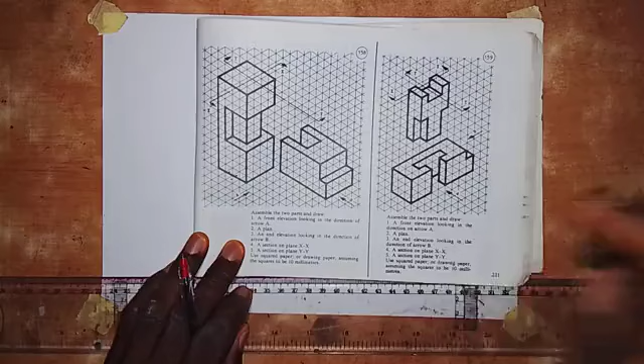Here we are going to be working on these problems on page 231 of J.N. Green Technical Drawing Textbook. As I said, here we are to assemble the two parts and draw question 1, a front elevation looking in direction of arrow A, question 2, a plan, question 3, an end elevation looking in direction of arrow B, and question 4, a section on plane XX, question 5,

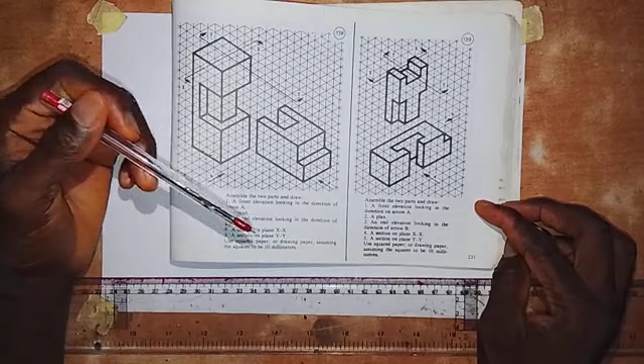a section on plane YY, and we have to use squared paper or drawing paper, assuming the squares to be 10 millimeters. I do not have a squared paper, so I'm making use of a drawing paper. Alright, so we are going to start with a video on the assembling of the parts, because we are going to have a video for each of these questions so that we can find it easy to do.

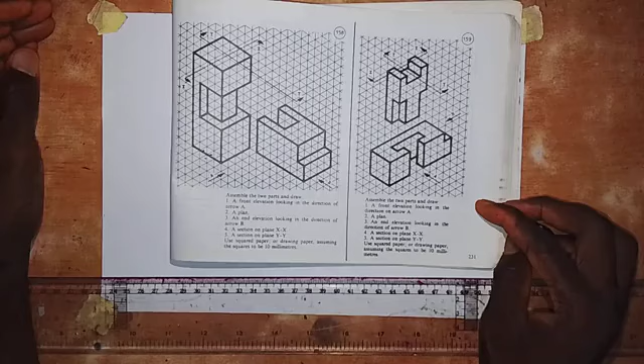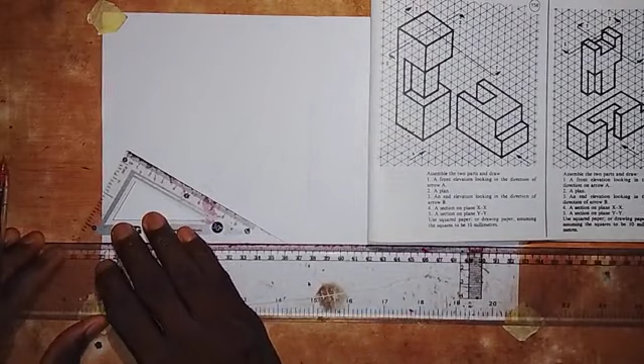So let's start with the assembling of the part. As you can see, we are putting this part in here. So we are going to start with the construction of this particular part here. Let's start: we're going to draw a line in this direction, and then from this point I would also draw a line in this direction like this, and then I will set my set square up like this and draw a vertical line from this point up. So we have this.

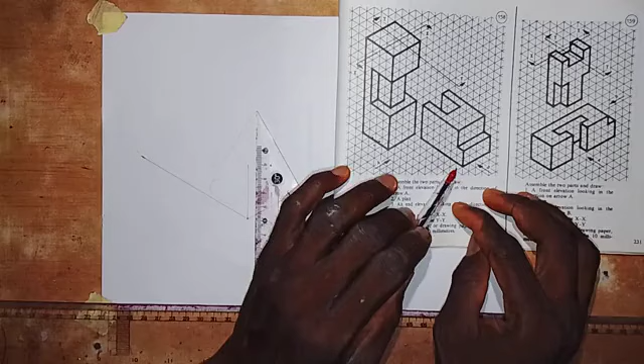We are going to be taking the measurement of this line, and this short vertical line here. So how many squares do we have here? We have 1, 2, 3, 4, 5, 6, 7. That is 7 squares. We are going to multiply it by 10, and that will give us 70. So we take a measurement of 70 millimeters. Why am I using 70 millimeters? Because we are told that each square has a dimension of 10 in length.

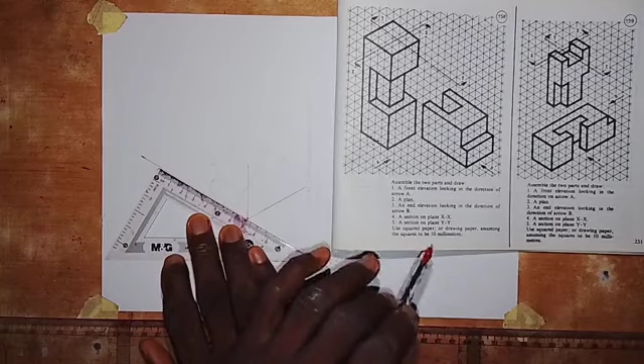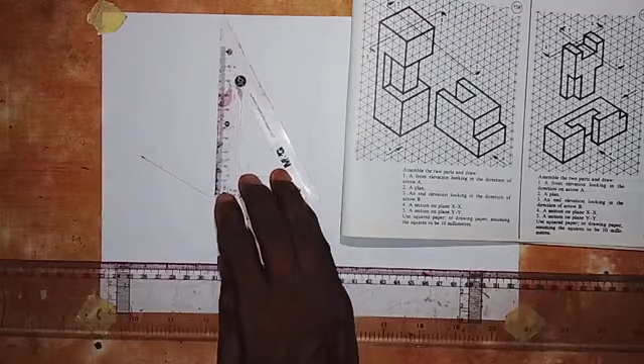Okay, so here we have 70 millimeters, and I come to this side here. How many squares do we have on this side? This is 1, 2, 3, 4. Multiply by 10, that is 40 millimeters. And for this short vertical line, we have 1, 2, that is 20 millimeters. So take a measurement of 20 millimeters up like this. Then we draw a vertical line at this point, and from this point I'll also draw a vertical line up. Then this 20 that we took up here, I'm going to join it together with this point. So we have this now.

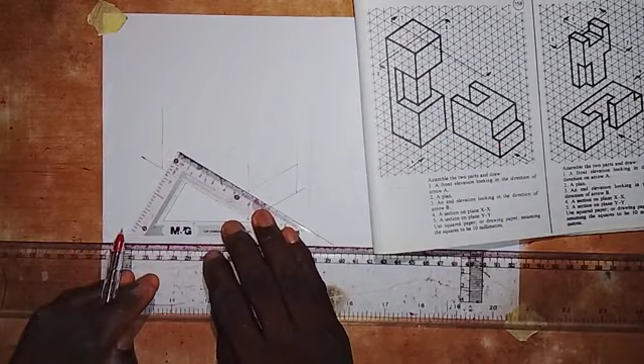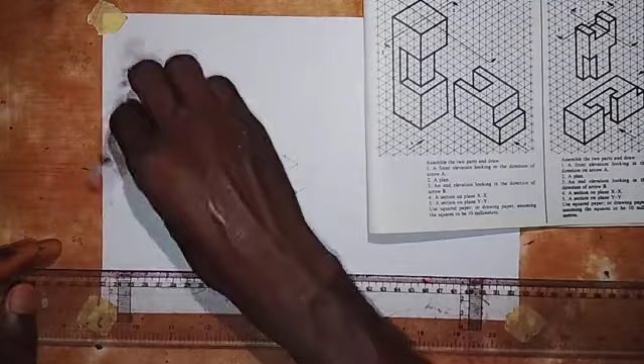Then at this point, we need to draw this short line, which is 10 millimeters, as you can see there. So I will draw a short line in this direction, and I will also come here and draw a short line in this direction. I'll be taking a measurement of 10 millimeters from this point. Then I'm going to transfer this point to this side. So with what we have done here, we have this surface now.

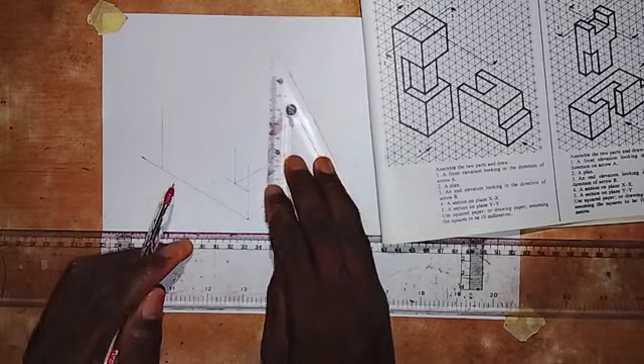Then we also have this vertical line, and this vertical line. So we are going to draw a vertical line up from this point, and at this point also I will draw a vertical line up, and I'm going to take a measurement of 20 millimeters up, because we also have this to be 1, 2. That is 20 millimeters. Then I'm going to transfer this point to this side, and then I will transfer this point onto this vertical line.

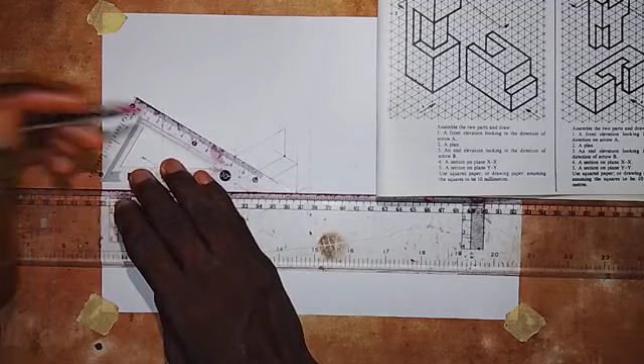I'll transfer it onto this vertical line, so it goes in this direction. Then coming to this point here, I'll also draw this line in this direction, and then I'll transfer this point onto this line. Okay, so if you look at what we have here, we have this object, but we are left with this part here, so let's bring that out.

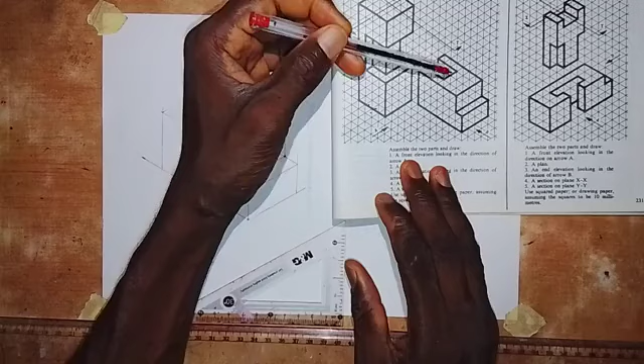So as we have here, we have just one square here, which is 10 millimeters, and this also one square, 10 millimeters. So the total is 40. If you look at it, we have 1, 2 in this middle here. So that means we are taking 20 millimeters in the middle, and then the length from here to here, 1 2 3, is 30 millimeters. So let's work that out.

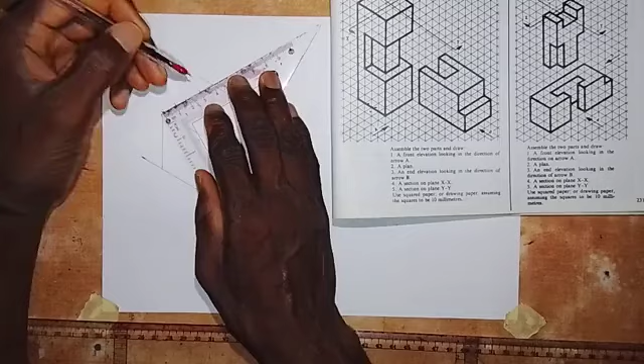So just set your ruler at the point here. So here I have 10, and then I also have this to be 10 millimeters. So in the middle I have 20 millimeters. So I'm going to draw this line here. I will draw it forward like this, and then coming to this point here, I will also draw this line. I will draw it forward here.

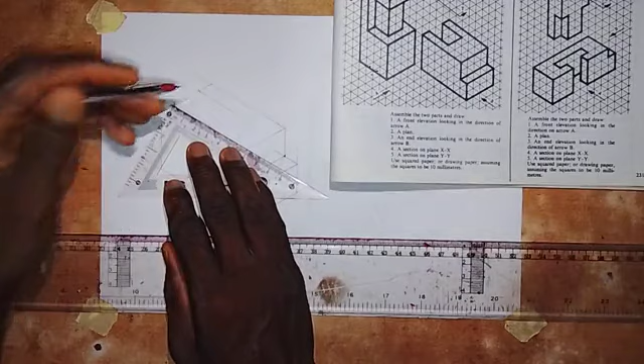Then I'm going to take a measurement of 30 millimeters from this point forward. So this is 30 millimeters here. So I'll just draw this line, but I will draw it across like this. There's a reason for that. Okay, so what we are left with is to draw this line. But I'm not going to draw it because by the time we put this in, it will not be shown. You cannot see it. So let's leave that aside. So we are bringing this in now.

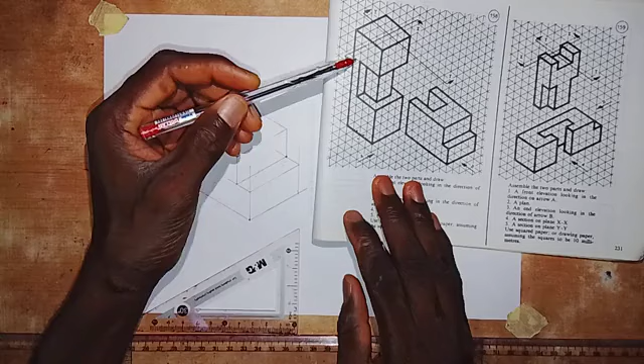All right, so this is what I'm going to do. If you look at the total from here to here, how many squares do we have from this point? This is 1 2 3 4. It's actually 4. Okay, so when we put this in, we are going to see this 10 millimeters here, this thickness from here to here. We are going to see it outside here.

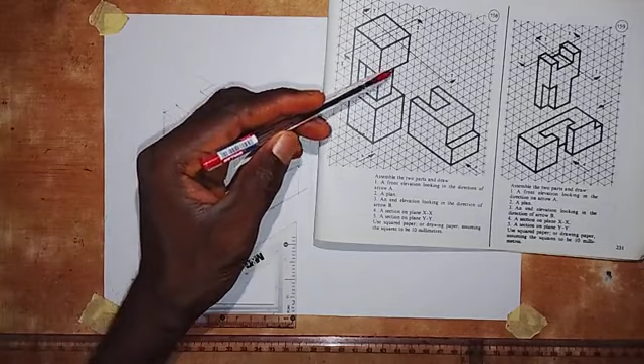Okay, so then this line here will fit perfectly onto this line, because from here to here is 30, which is 30 from here to here. Okay, so it will fit. This line will rest on this line here. That's why I drew this line. Okay, so now let's look at what we are to do.

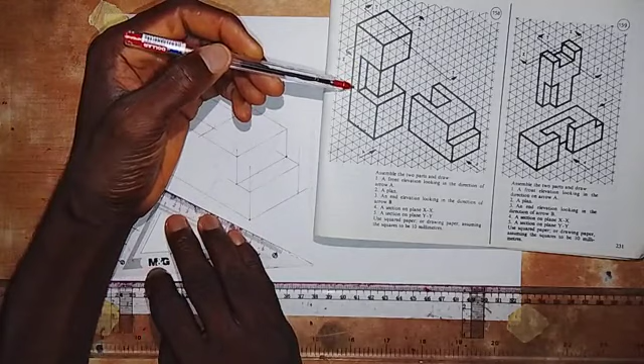So what I'm going to do is take a measurement of 10 millimeters, because this 10 millimeters will be outside here. Okay, so this line here will be touching this surface. So if you look at the distance of this line from here up, this is 1 2 3 4. And then this is 40 from here to here. Okay, so it just fits perfectly onto this line here.

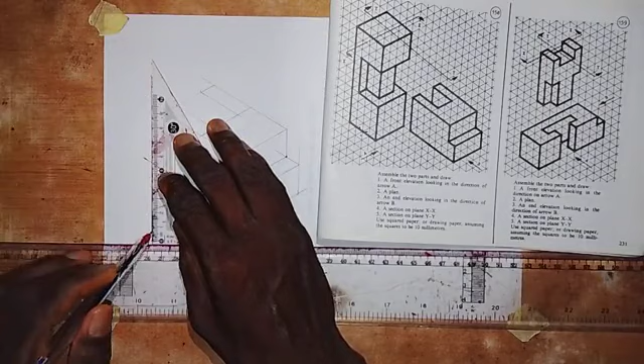I mean this line. Okay, so we take 10 millimeters backward like this, and then we are going to draw a vertical line. This vertical line is going to represent this line that we have here. So I'm going to draw a vertical line like this. Then having done that, the next thing I'm going to do is come to this point.

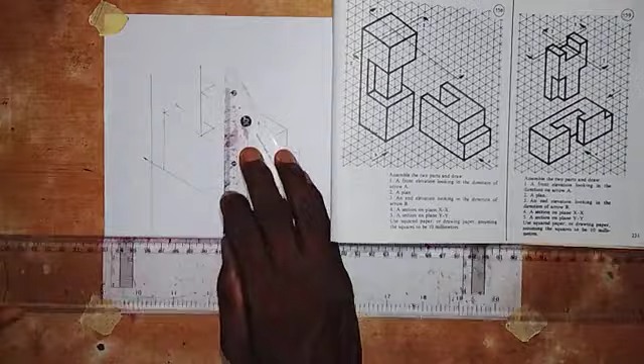Okay, if you look at the thickness from here to here, it is 40 millimeters, and this is also 40 millimeters. So we need to draw a vertical line up here at this point. Okay, I can't see that line very well. So we draw a vertical line here, and then I'll come to this point here, and I'll also draw a vertical line like this. Okay, so we have this.

Then what is the height from here up? So this is 1 2 3, that's 30 millimeters. So I'll come to this point here and take a measurement of 30 up. So that's 30.

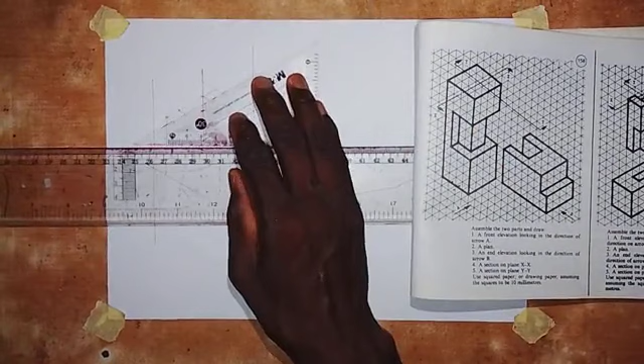So this 30, I will now transfer it. I'll transfer this 30 to this side to touch this line. Then I'll come here, and I still need to extend this vertical line so it goes up a bit. And then I'll transfer this line onto this line.

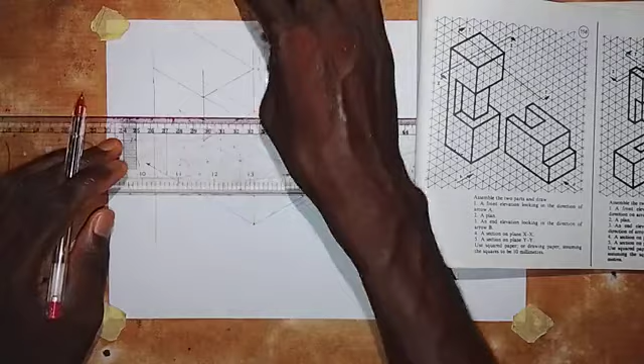Then I'll come here at this point. I'll also extend this point, and then I'll join these 2 points together to form this surface that we see here in the assembly. So this is what we have.

So what I need to do now, for this part that we have down here, which is similar to this, we just need to transfer this line down. So I'll come to this point here. I'm not going to draw it on this surface, so I'll just take it down from here like this.

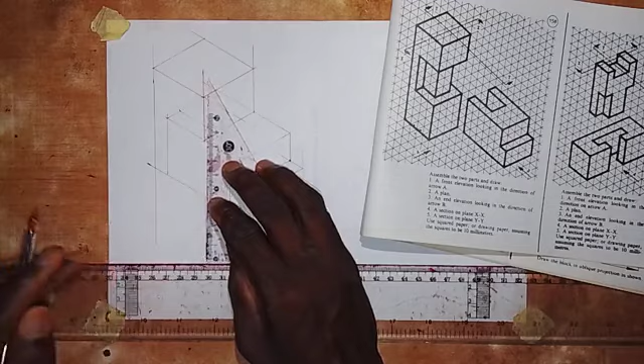Then as we had from here to here, this is 1 2 3 4. So this one is 40, while the upper one is what? Is 30. So the one down here is 40. 1 2 3 4, we have 4 squares. So we take 40 millimeters down. So this is 40 millimeters here.

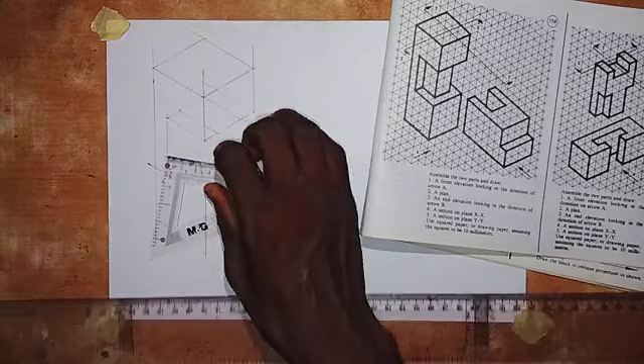Then we transfer this point here to this side, so it goes this side like this. Then we also set the set square like this. If you look at it, it goes with this line. So I'm going to draw this like this. So this is how we are going to have it here. So we have assembled the 2 parts.

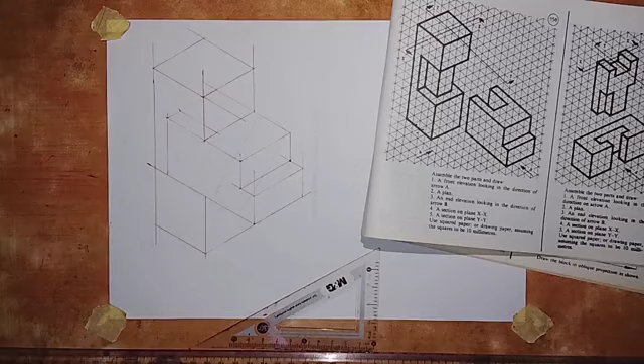If you look at it very well, the 2 parts have been assembled. So what we have to do now is bring out the thickness of the edges of the two parts as we have assembled them. So I'm going to make this line a thick line from here to here, so that we can see it. And this line also, we need to make it a thick line.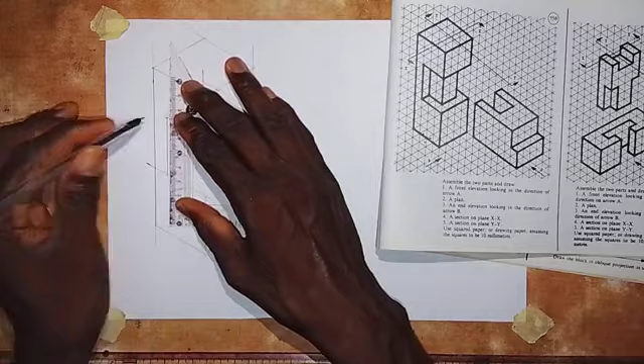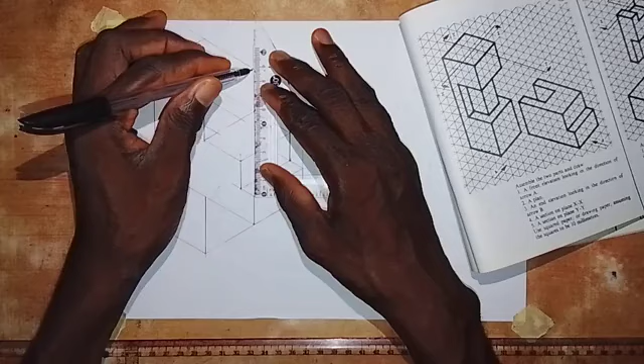Then coming here, make this line a thick line from here down, and this also is a thick line from here to here. Then I will come here and make this a thick line, and I'll make this a thick line. Coming to this side, we draw this as a thick line. I'll do the same thing here. So working on the vertical lines or vertical edges. Looking at this, I think we are done with the vertical.

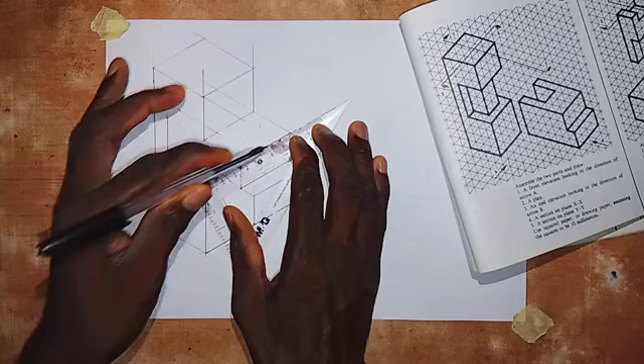So now let's work on these two lines. We can draw them together like this. Then here also draw this, and then coming up here, and here also. Then we have this, and on this side, we also make this line a thick line to this edge, and then this line will be a thick line from here to here.

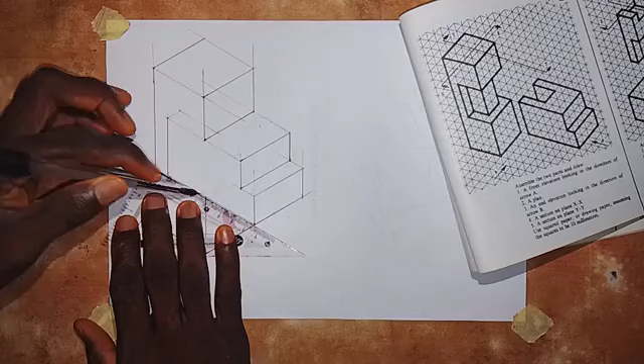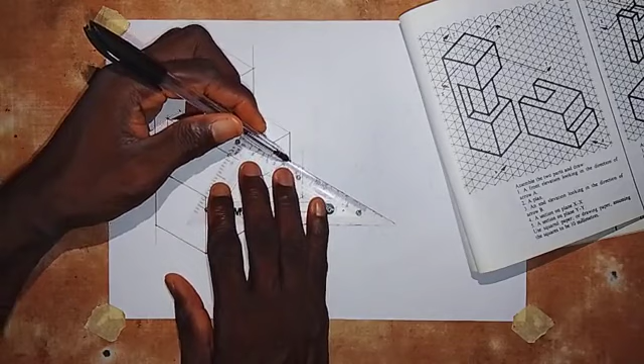And then we also have this short line from here to here, we have it. And this short line, we also have it here. This line also, make it a thick line from here to here. And this line. Then lastly, this line, we have it as a thick line. All right, so we have assembled the parts, and this is how it should be. It's as simple as I've done it here.

All you have to do is to practice, and when you practice this, you become a master at this work. Do not forget that we still have the main questions to answer: the front elevation, the plan, the end elevation, section XX and section YY. So we are still going to work on that. We have a video for each of them.